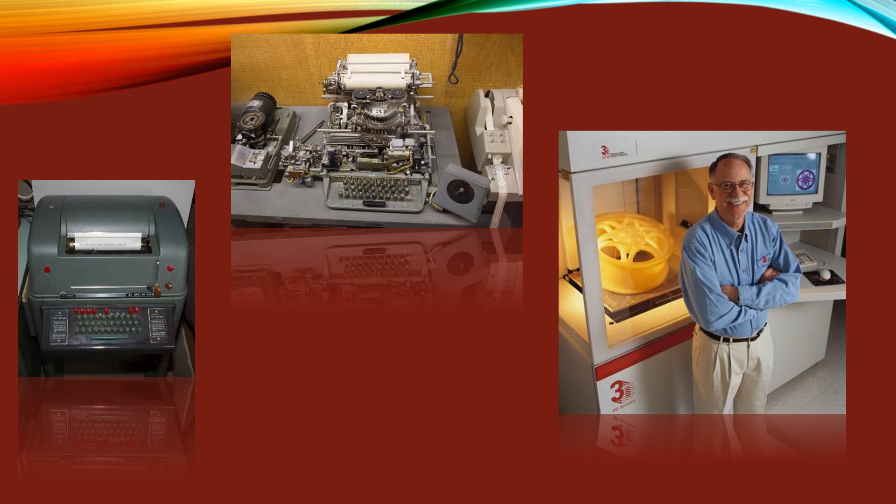Here are a couple of early printers, typewriters really, along with a modern 3D printing machine. The internals of a typing machine are mechanical, intricate, and complex, and 3D printers today are sleek, simple, and digital. They're created with ubiquitous machines that have been synchronized. Printing is an additive type of manufacturing where you add materials layer by layer instead of removing materials to create a shape.

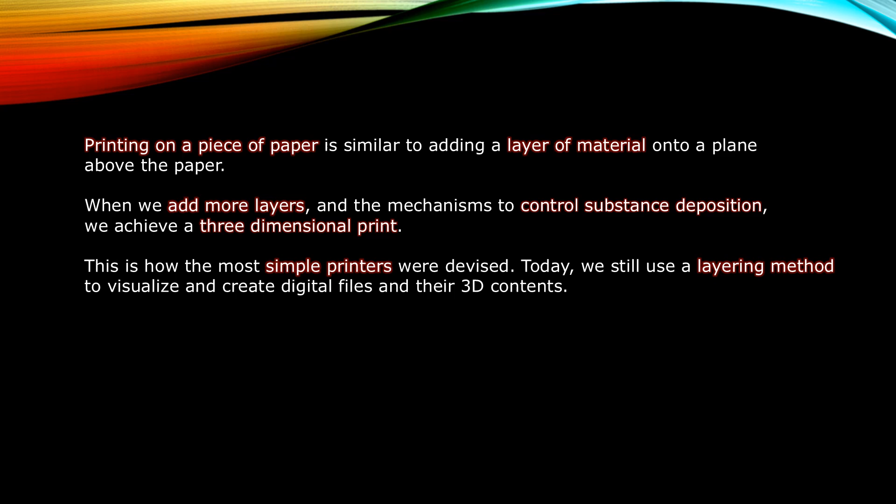Consider printing on a piece of paper. Really, we're adding a small layer of material on top of the paper. 3D printing is effectively the same. When we add many layers and the mechanisms to control where and how much material is layered, we have three-dimensional printing. In fact, most digital objects can be considered in many layers. This makes it easy for the machine to interpret each layer rather than a whole object at once.

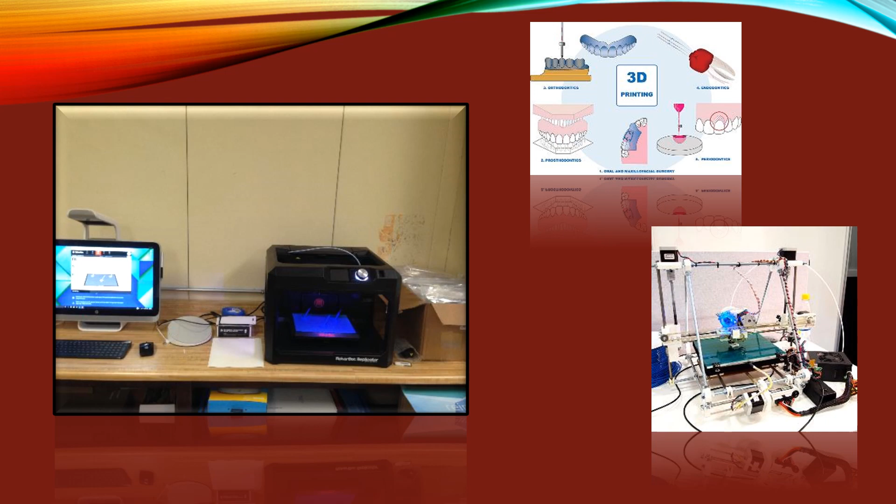A desktop-sized 3D printer, along with the skeleton of most 3D printers. All printers work on a graph coordinate system. They move left, right, up, and down. They use electric servo motors to do this very precisely. The motors are controlled by computer software. If you need a new tooth, it's likely that the dentist will make a really precise image of your teeth and fill in the gap with a 3D printed tooth.

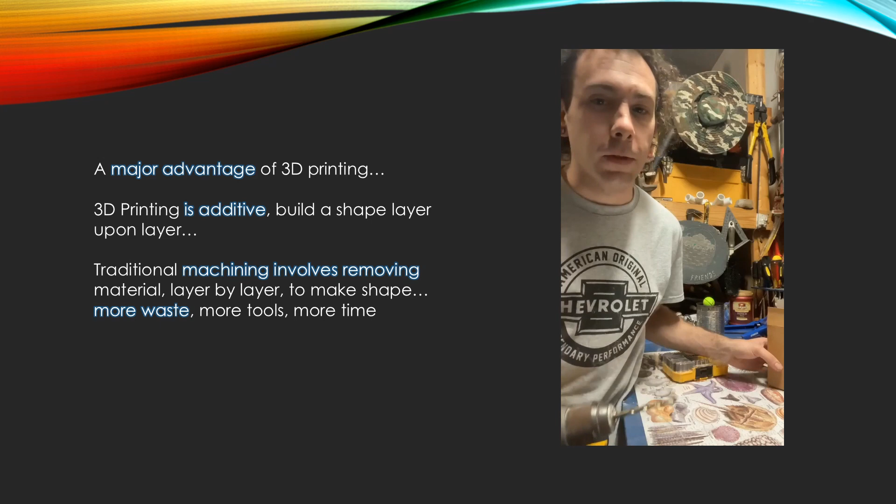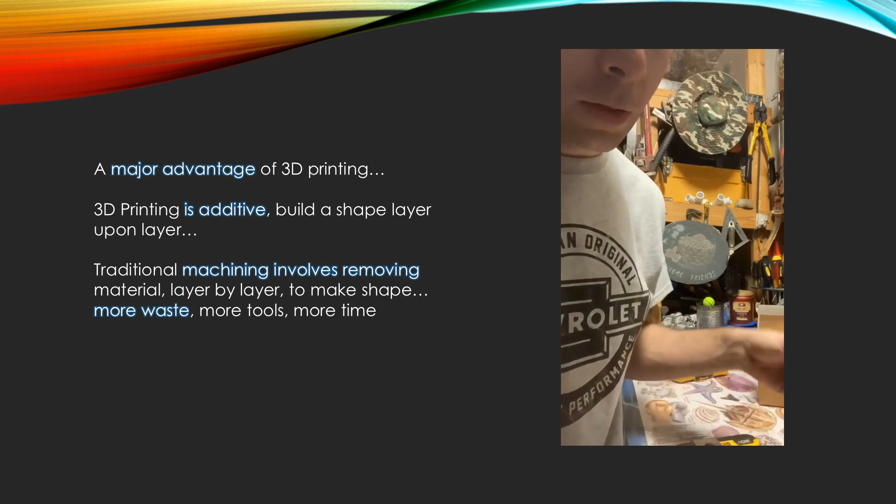A major advantage to 3D printing versus other types of manufacturing is that instead of manually removing material, you can simply print any feature or hole you want. No additional work necessary.

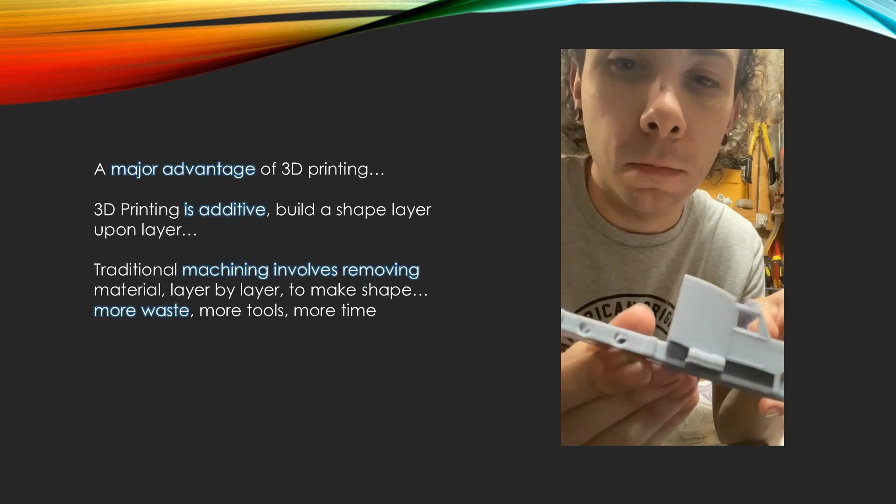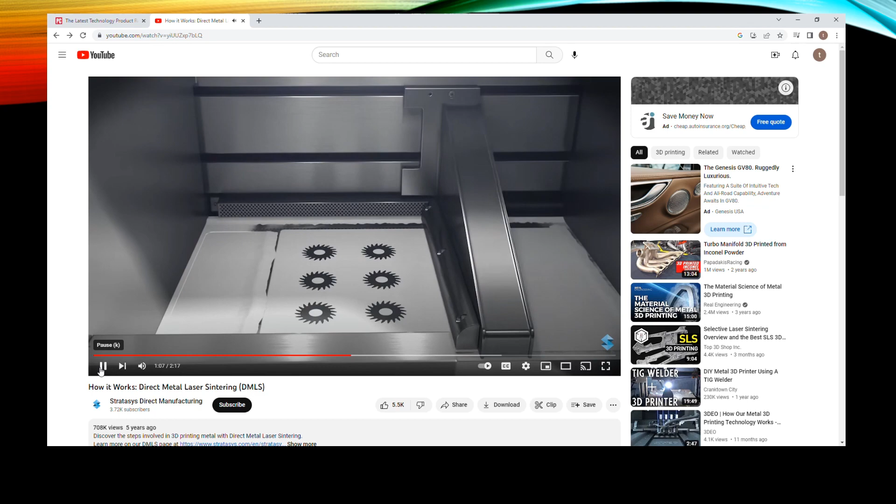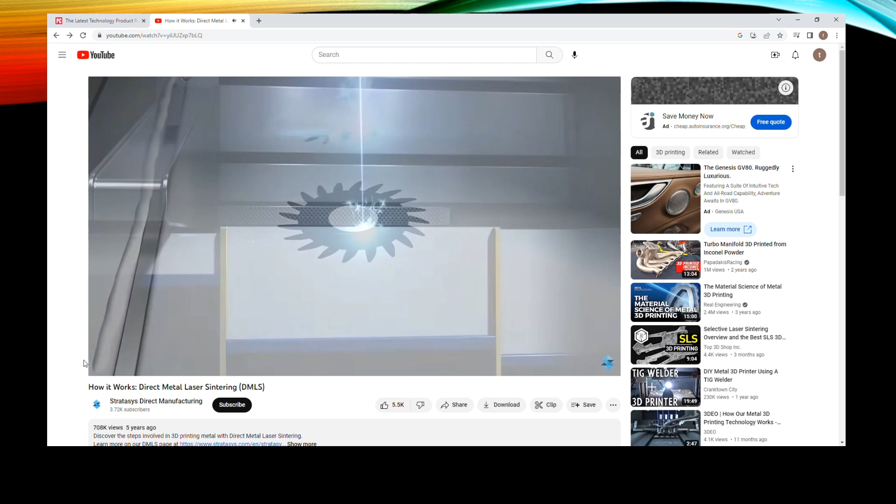A recoater assembly pushes powdered metal material from the powder supply to create a uniform layer over the base plate. A laser then draws a 2D cross-section on the surface of the build material, heating and fusing the material. Once a single layer is complete, the process repeats for the next layer.

Okay, currently we are able to print all types of materials: plastics, ceramics, metals, and even composite materials created specifically for 3D printing. Amazingly, we're even able to print living cells, and we have attempted to print human organs for transplant. With 3D printing, there have been many breakthroughs in technology and manufacturing.

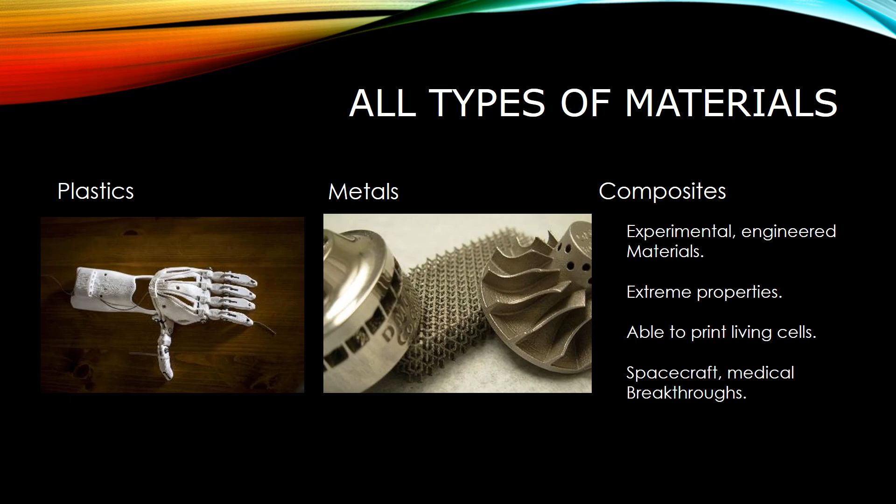Moving on, let's think a little bit about a 3D printed home. As you have learned, we can print nearly anything: small gears, complex shapes, and even living things. So to 3D print a home is actually a simple idea, and we really only need a machine large enough to print something so big. Additionally, we need to rethink the home building process, as most of the work will be done by a programmed machine rather than a team of construction workers.

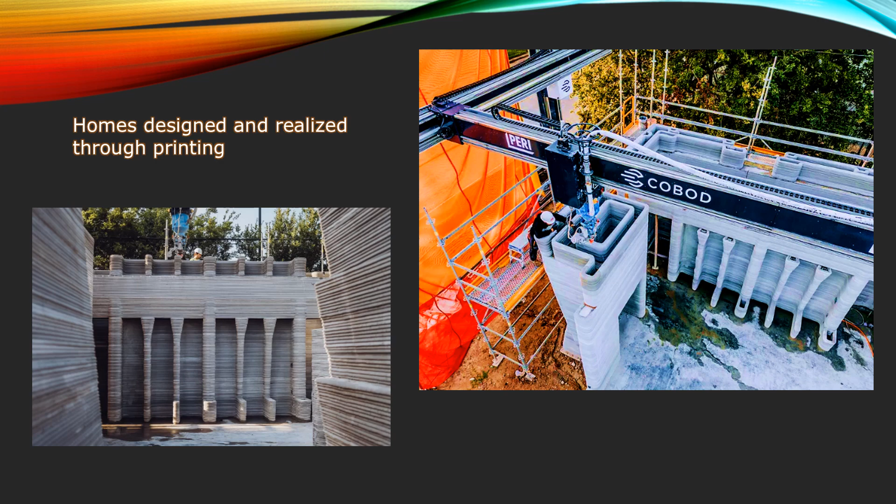The advantages of printing a home include a faster build time, the ability to run the machine 24/7, a higher degree of efficiency and less waste, and overall it's beneficial because it's less labor and resource intense for humans compared to traditional home construction.

The disadvantages are that the advantages have not been realized. They're simply just good ideas. Additionally, printed homes are not very popular. It will take a lot of investment, time, and pushing the machinery to its limits before we're able to print homes on a mass scale.

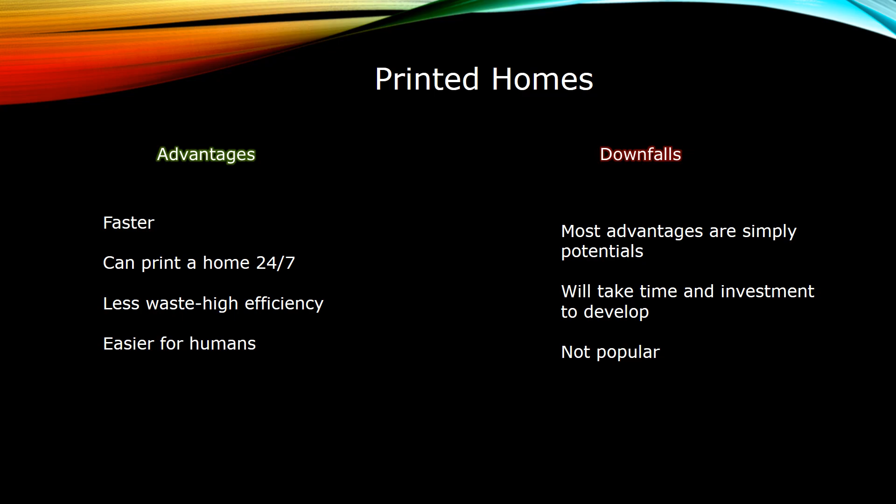Even Habitat for Humanity is investing in 3D homes. Personally, I believe in the benefits of printing homes. If we can reduce the labor needed to build housing while keeping skilled jobs open and costs down, it's going to be a competitive option. Right now, it doesn't seem like rent prices will ever go down, and somehow there needs to be more affordable, safe, and efficient housing. If we can realize 3D printed homes, maybe we can have a housing revolution.

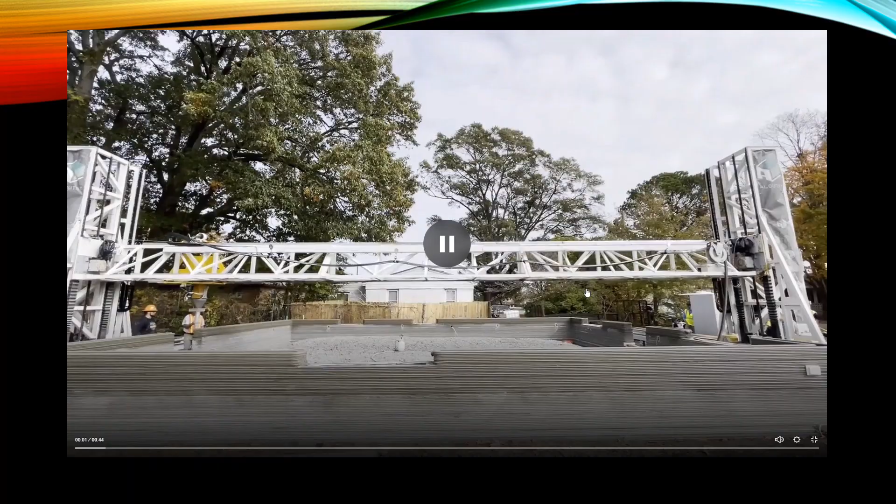Here's a simple representation of the printing process. I took this video from Alquist 3D where they're trying to prove the process with Habitat for Humanity.

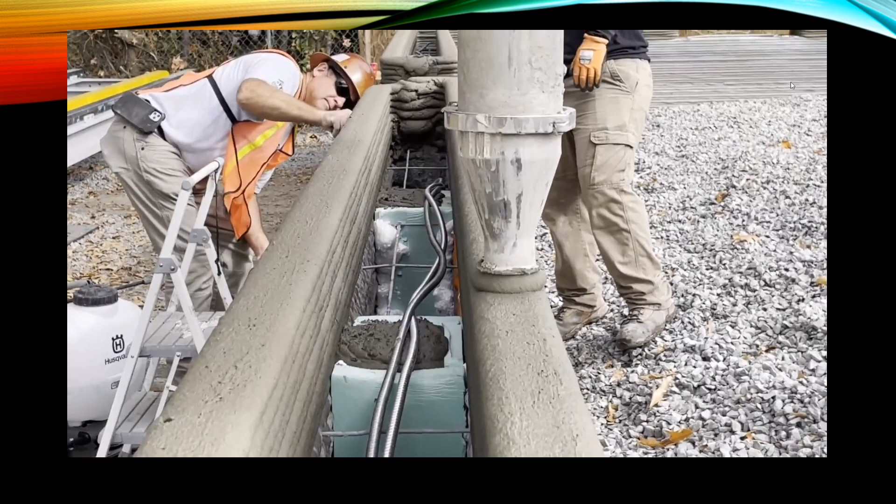Pretty cool. To build a home, a truck, or anything with a 3D printer, we need to build a set of coded instructions that the computer and machine understand. We need a program. But before that, we need an idea. So in your mind, you visualize what you want to build. It could be totally original or a complete copy.

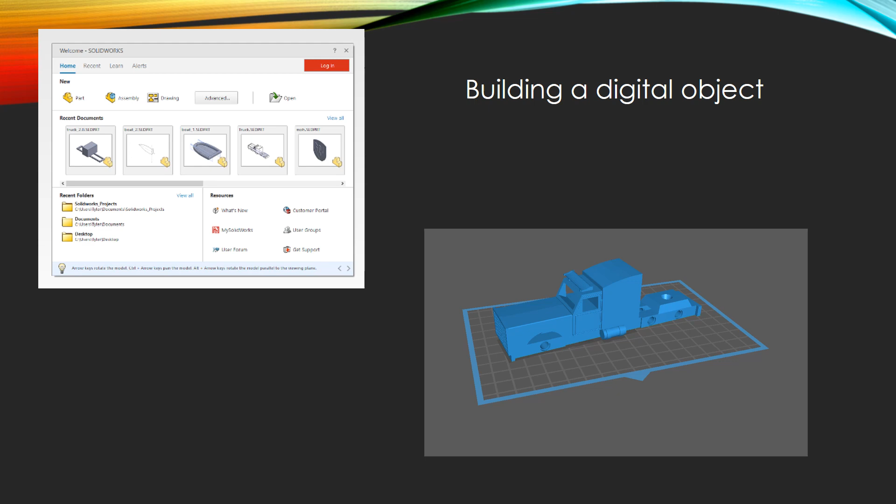Now imagine splitting the object into horizontal layers and drawing each layer by hand from the bottom up.

It can be a tremendous undertaking to engineer and draw a totally new digital thing. You need education and skill in the software and methods used from design to production. This whole process is called 3D modeling. To make things easier, we break down into smaller tasks and problems. Initially, we use simple shapes called primitives, and then from that, we build with fine lines and intricate features.

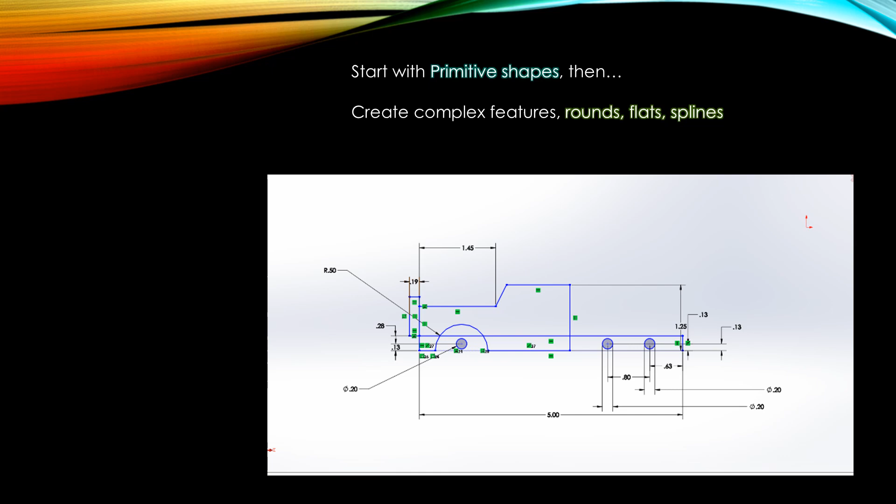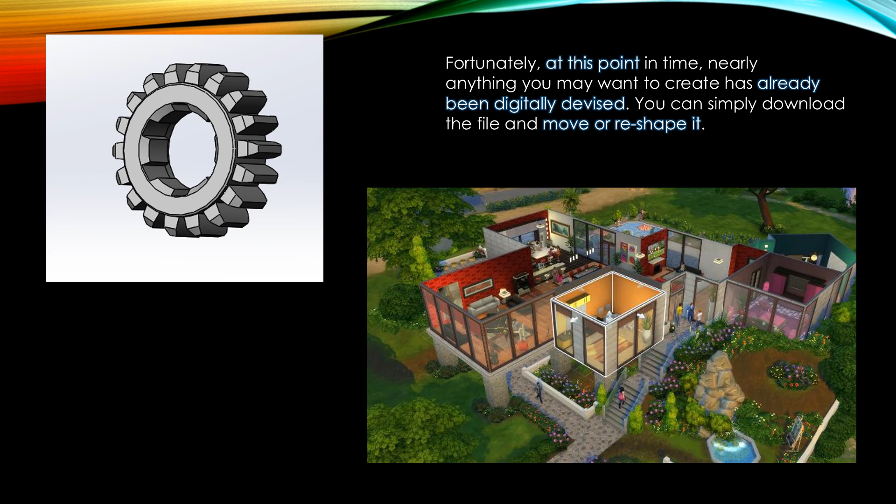Some things do require attuned math skills and intense knowledge to successfully create. Fortunately, by this time, most things you could think of have already been designed. Think about the video game The Sims. Every object in The Sims universe needs to be manually created by a human on computer software and uploaded to the game, and be able to interact with all of the other objects in the game. With more beautiful and complex designs, we're going to need more powerful computers.

Here's what you can do at home. At home, you can find a good 3D printer for a few hundred dollars. It should be pretty easy for anyone to set up and operate. Some styles of printer are more difficult, and some are very easy to get started. Some are able to print highly durable parts. What you choose in a printer will be based on what your needs and plans are.

The size of a printer is reasonable. Normally you'll need a space away from pets and kids, where it won't be disturbed at all. A garage or a shed is perfect. If you require a bigger piece, maybe you have a big idea or just need a very large printer, you can check out a local makerspace. A makerspace will likely have large-scale community printers and helpful members.

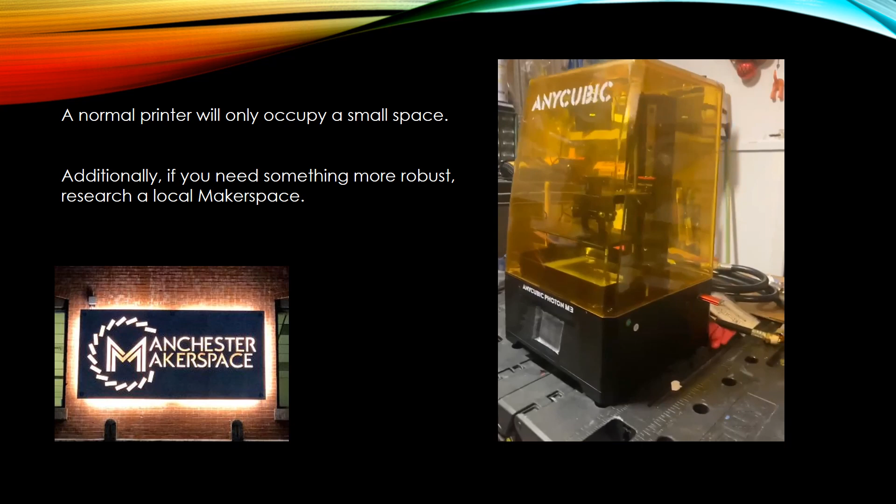Don't forget to put everything together. You'll need to draw your imagination. You can pay for advanced software, or there's plenty of free options, and even a free program will have the power for basic 3D modeling. These programs work on parameters, limits that you define mathematically and digitally. The software makes it very user-friendly and easy to work with after just a short time, so get creative.

3D printing is as easy as that. Simple machinery controlled by decades-old electronics and software. In recent times, it has become accessible as a hobby or trade for anyone with interest. Someday, you may choose to have your home printed, and you can even try your hand at designing your dream home on a computer. 3D printing is nothing new, and every day it seems we're closer to automatically printing anything, anytime, and anywhere.